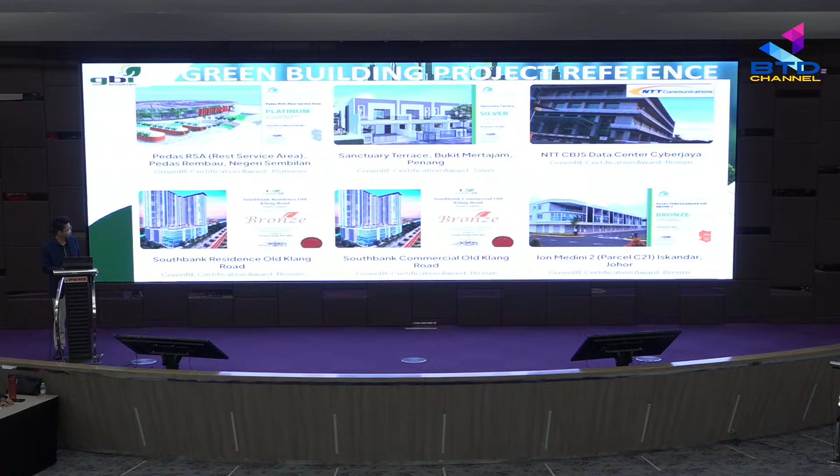So next I would like to go into a brief introduction of what green building is all about. So in today's session, we are going to cover 5 parts. Introduction to green building, and also introduction to specifically GBI untuk residential new construction. Lepas tu, it will be divided into 2 parts. Part 1 untuk energy efficiency and indoor environmental quality. And part 2 for sustainable site planning and management, water efficiency, material and resources, and also the innovation points lah. Yang paling last sekali kita akan tengok kepada green incentive.

So without further ado, what is green building actually? Actually green building refers to a practice of creating structures and processes that are environmentally friendly and resource efficient throughout the entire building punya life cycle. Dia start daripada site selection, to design, construction, operation, maintenance, renovation, and even demolition.

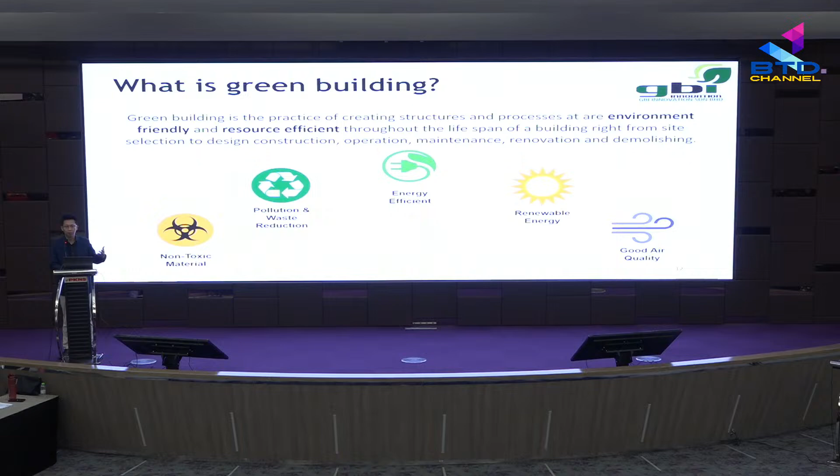So for the business benefit, of course, when we look at green building, we're probably looking at a higher investment capacity. The upfront cost will be higher, but ultimately, if you look at the long term, with good design and good material selection, operation costs will be lower in the long run. So overall, you can still see that the building will actually require less cost to operate.

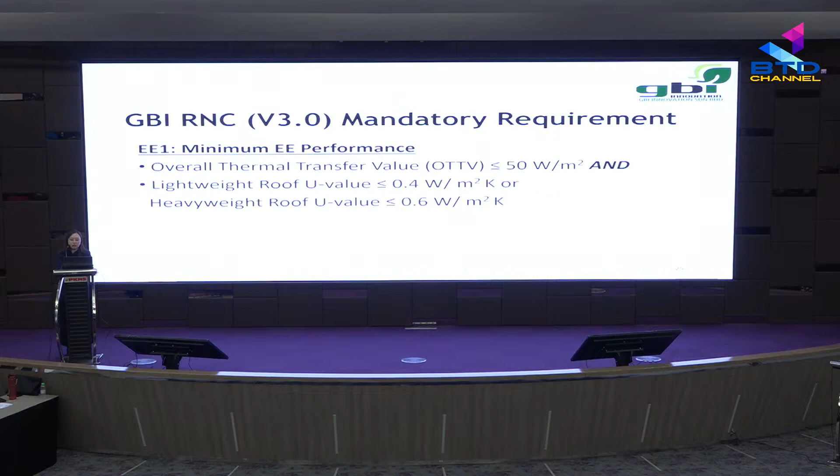So we would also like to emphasize that in GBI RNC, as well as other GBI tools, it is a mandatory requirement to have your overall thermal transfer value of the building, or OTTV, to be less than 50 watt per meter square. And your lightweight roof U value must be less or equal to 0.4 watt per meter square Kelvin. And if you have a heavyweight roof, then the requirement would be a U value of 0.6 watt per meter square Kelvin.

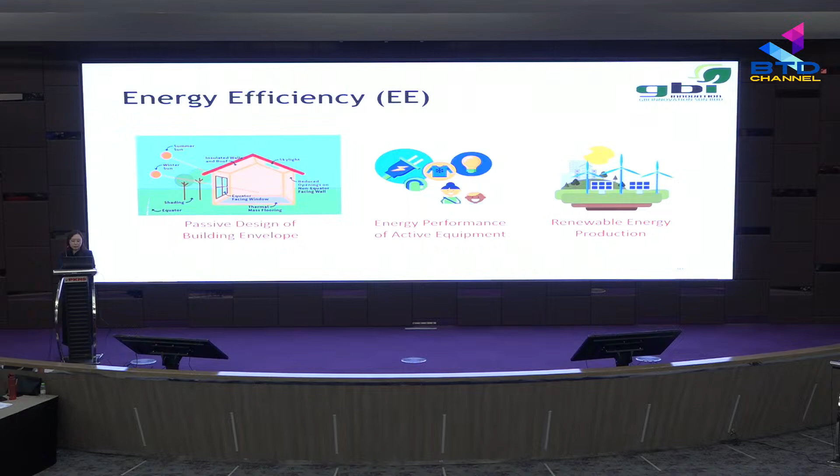So to ensure your building is energy efficient, we'll need to look into these 3 main factors. The first one would be passive design of the building envelope. The next one will be energy performance of the active equipment, or lighting and air conditioning. Then the third one will be renewable energy production, or solar PV. So when we talk about passive design of the building, we are looking at the architectural design of the building that indirectly affects the energy consumption.

So this would mean we are looking at the building envelope. So what is the building envelope? It is the exterior part of the building that separates the interior from the outside environment. Components of the building envelope include walls, windows, roof and doors, etc. These components work together to shade, to insulate, to ventilate, and to daylight buildings. These strategies are also stated in MS 1525, the Malaysian Code of Practice on Energy Efficiency and the Use of Renewable Energy.

So the first 2 credits would be minimum EE performance and advanced EE performance. Firstly, it would be looking at the overall thermal transfer value, or OTTV. OTTV is a measure of how the building's passive design is able to reduce heat gain through the building envelope. This would result in a lower cooling load in the air conditioning system, and consequently lower the energy consumption of the building and also operational carbon emissions.

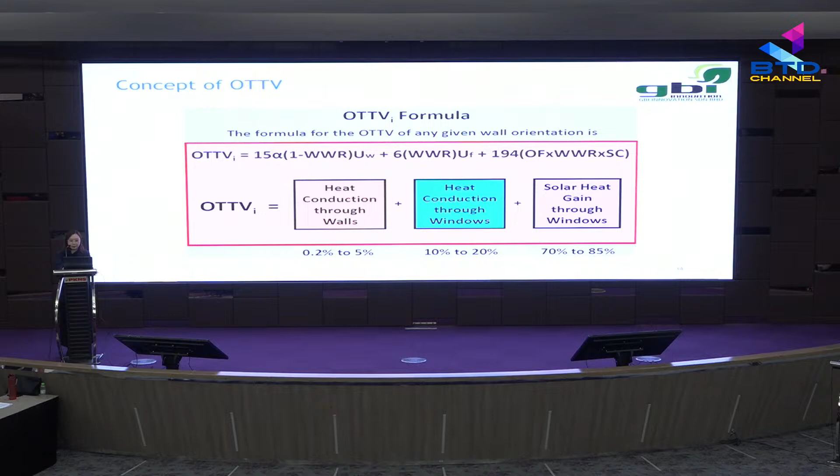So for the first part of the formula, we can see here that the alpha value in the formula is referring to the color of walls. Then we also have WWR, or the window to wall ratio. And Uw would be the U value of wall. By U value here, we mean the thermal transmittance of the wall.

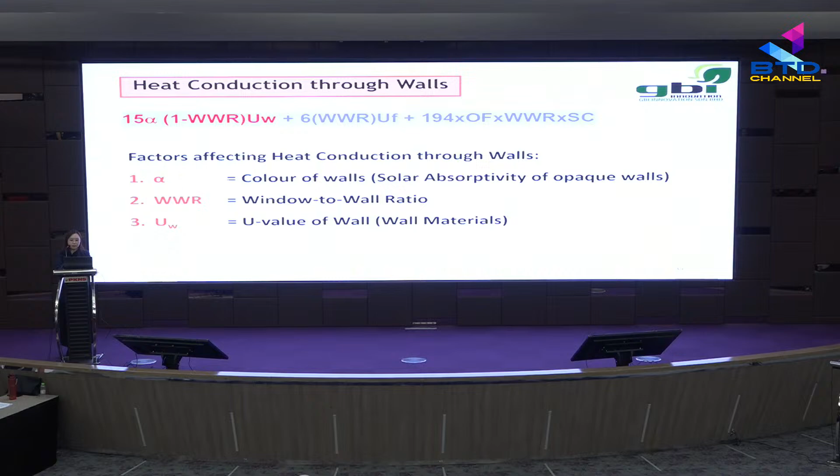So as for this first part, we will look into the wall materials itself. For the wall material, the U value itself is a very important value, and it's a measure of the material's ability to allow transfer of heat into the building. So the lower the U value of your wall, it would mean that it will allow less heat to transfer inside into the building interior.

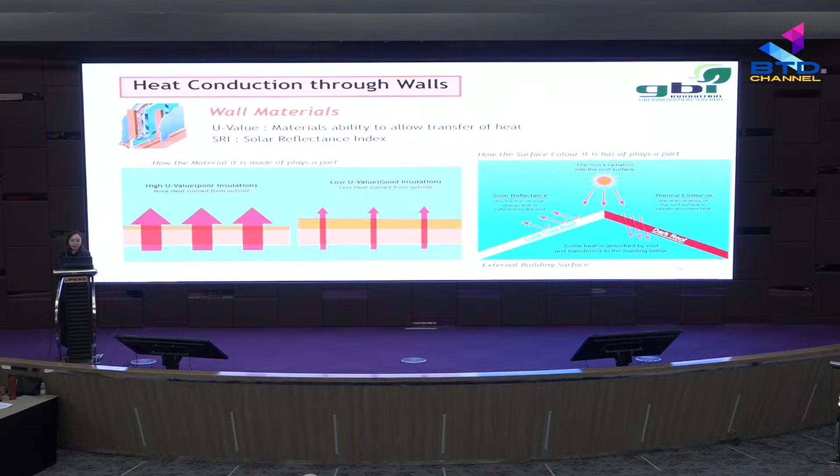So the next part of the formula would be the window to wall ratio, or WWR. The WWR here we mean is the area of windows divided by the area of walls. It is important to manage the WWR because of the solar heat gain of the building, as mentioned previously, then also the insulation effect through the windows, and also the amount of daylight penetrating into the interior spaces, as well as the corresponding amount of artificial light required to illuminate the room. And the last part would be how much shading devices need to be provided.

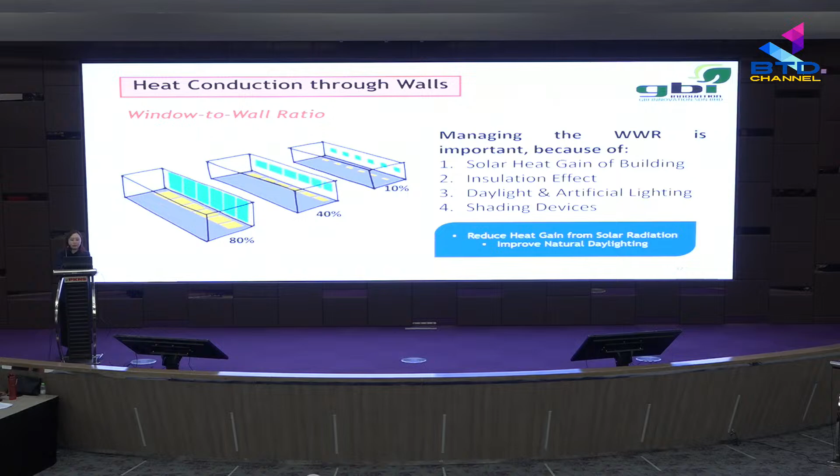So the next one would be how we calculate the window to wall ratio. We have a simple example here, where if we have a wall with 5 meter length and 4 meter height, and a window of 2 meter length and 2 meter height, our WWR can be calculated as 0.2 here.

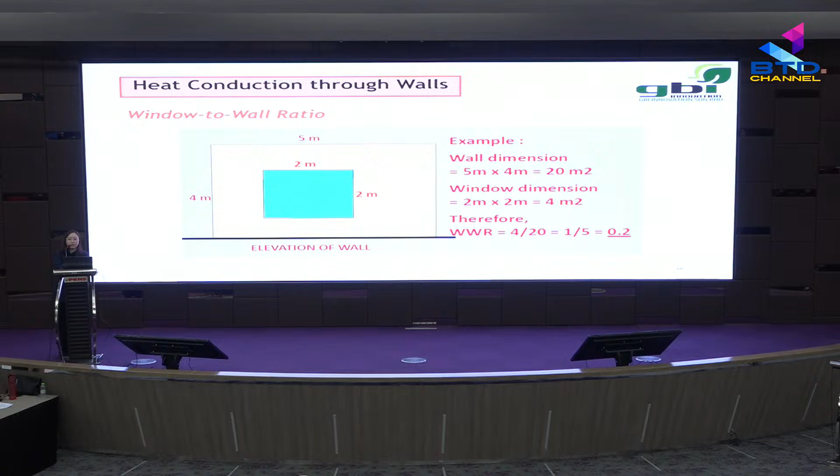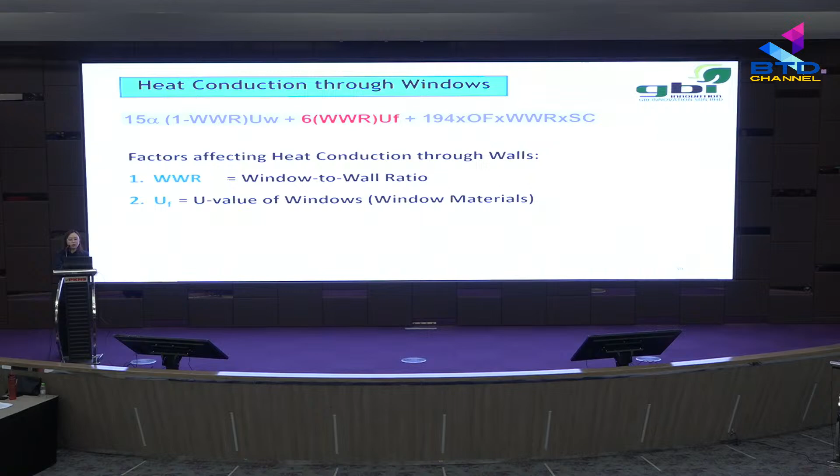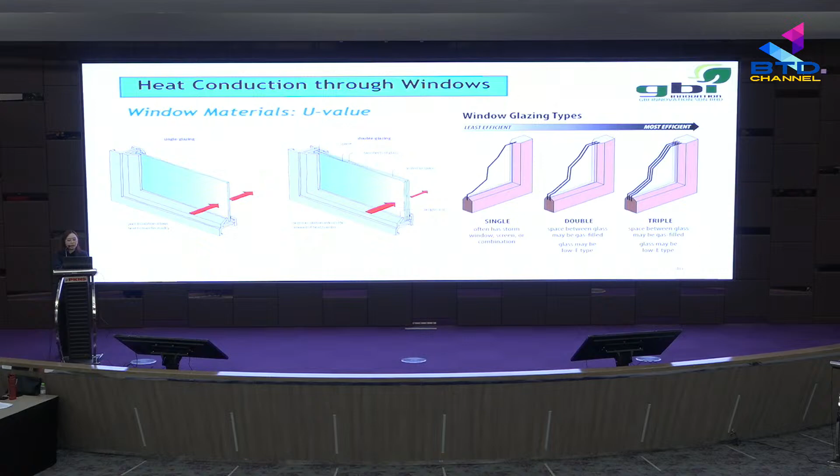Then the second part of the formula would be heat conduction through windows. From here, we also need to include the WWR, as well as the U value of windows, which is again the thermal transmittance. So the window material performance here is determined by, firstly, the layers of glazing, as well as the color. In this case, we mean that the laminated glass or double glazed glass can have a lower U value compared to a single layer glass.

As for the color of the window, if you have a darker color, such as dark green or dark gray, then it will be able to filter out more heat than a clear glass or light green colored glass. So in general, for compliance to the OTTV value of less than 50 watt per meter square, your thermal transmittance or U value should be less than 5.7 watt per meter square Kelvin, and your shading coefficient, SC value, should be less than 0.7.

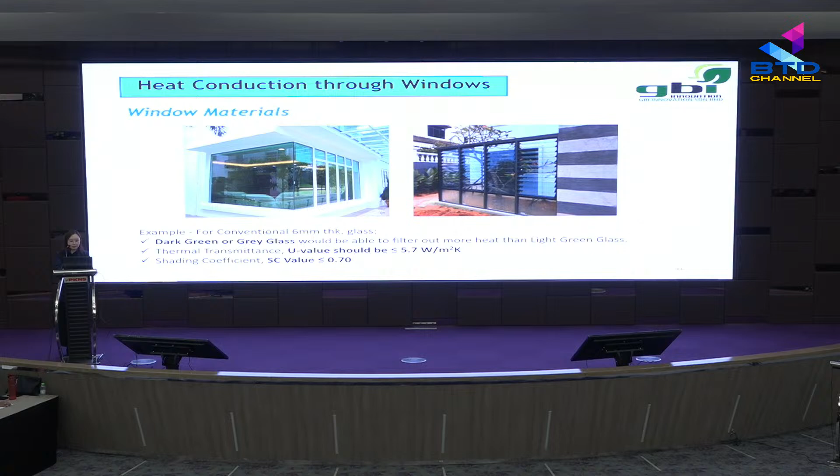So the last part of the formula would be the solar heat gain through windows, whereby we consider the orientation factor or OF, and once again the window to wall ratio, and the last part would be shading coefficient. The orientation of the building is very important here because of the east and west versus north and south exposure. So we advise to try to have lesser windows at the east and west directions, as Malaysia's tropical climate would cause intense sunlight in these directions, especially during the morning and afternoons. So we try to maximize the north and south orientation, therefore minimizing the solar heat gain into your building.

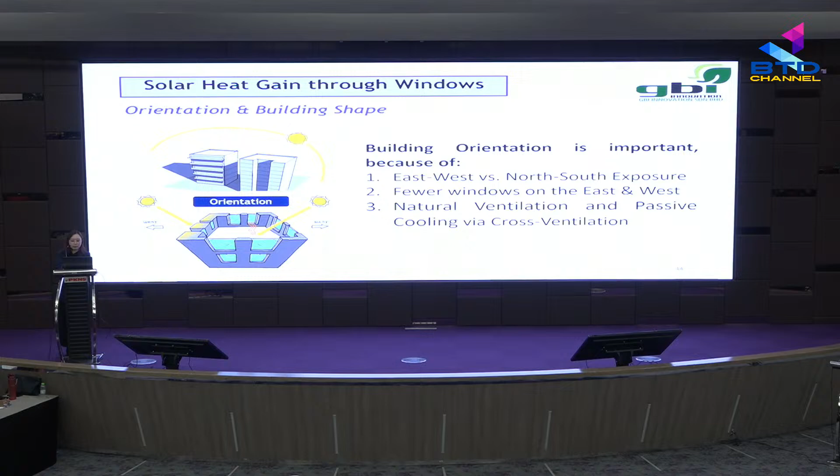And correspondingly, the building orientation will also affect how much natural ventilation and passive cooling that you are able to supply to your building. So the next part would be the SC value or shading coefficient. Actually we have two coefficients that we will need to consider here. The first one would be SC1, which is the characteristic of the window. A lower SC1 here would mean that a less amount of heat is transmitted into the building.

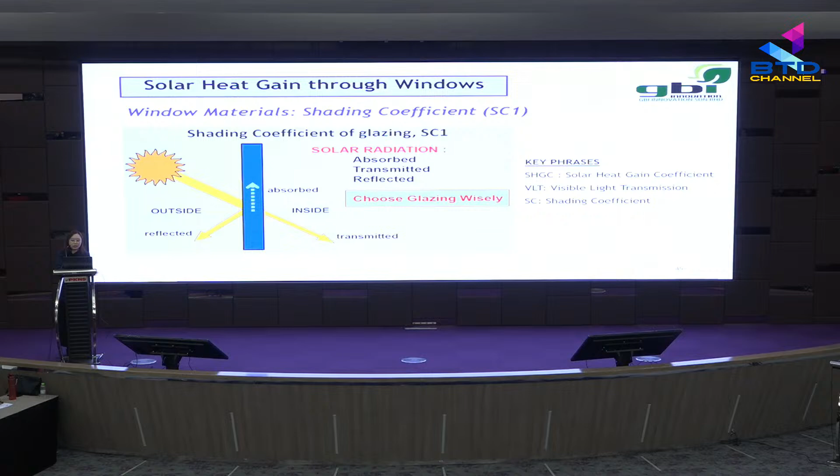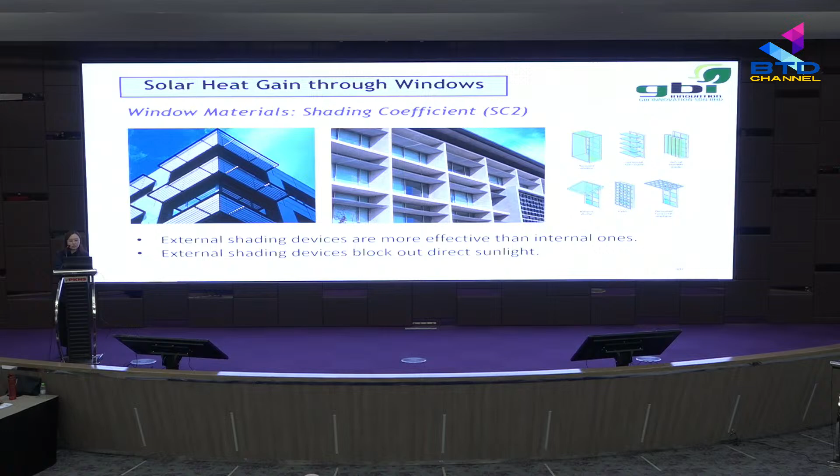But on the other hand, it will also mean that there's a less amount of light also transmitted into your building. So therefore, you also need to consider the VLT or visible light transmission value of the glass in order to make sure there's a right balance between how much heat gain you reduce and also how much good daylighting you bring into the building. Then the other shading coefficient, SC2, is affected by how much external shading devices you provide. This would mean horizontal or vertical shading devices, as well as recessed windows. So these will also need to be taken into account in your OTTV.

Then the second compliance value would be the roof U value. So as mentioned previously, your lightweight roof U value must be less than 0.4, and your heavyweight roof U value must be less than 0.6. So lightweight roof is defined as non-concrete roofs and have a density of less than 50 kilogram per meter square. And if you have heavyweight roof, it is referring to concrete roof with a density of more than 50

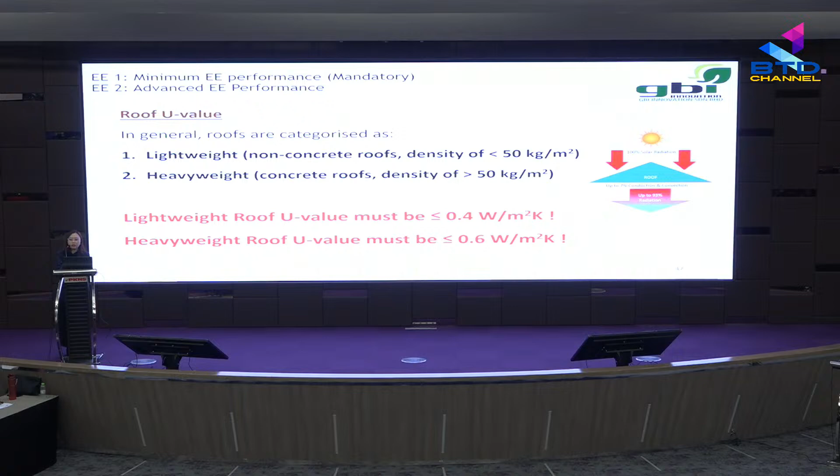kilogram per meter square. So this is in general how we would calculate the roof U value, where we take all the layers of the roof, and in order to comply with the mandatory conditions previously, you will need to include roof insulation into your roof. So normally it is divided into two types, which is the bulk and mass insulation, and also reflective insulation and radiant barrier. So in general, for lightweight roof, we would use mineral wool and glass wool. And for heavyweight roof, we would use spray foam or extruded polystyrene and expanded polystyrene.

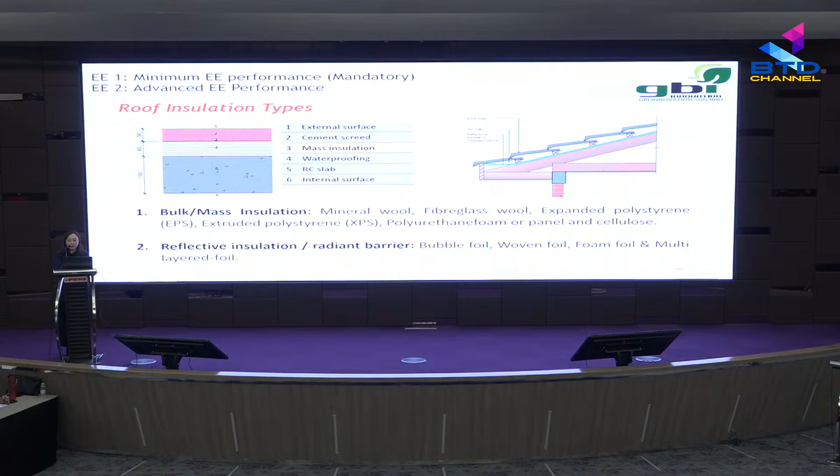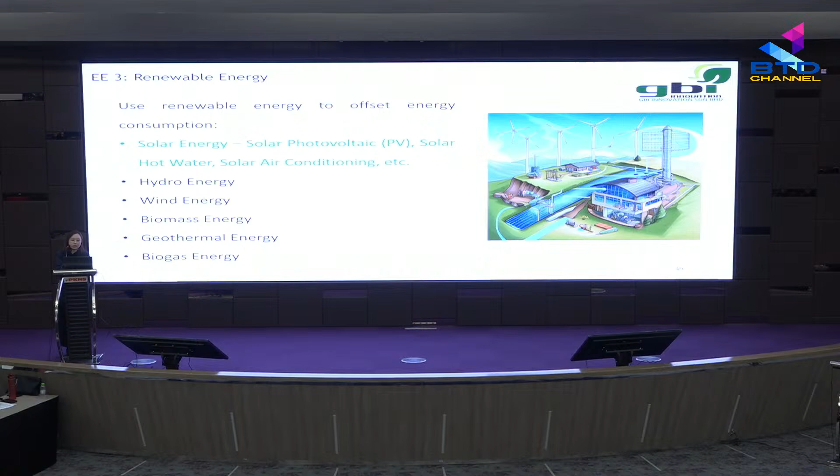So for the next part is EE3 renewable energy. So there are many types of renewable energy that can be used, but in this case, we are referring to solar energy. So this can be supplied using solar photovoltaic, solar hot water, and solar air conditioning. So solar PV here is highly recommended to be used to generate renewable electricity in residential buildings.

And for this criteria, we will need to supply the following to GBI for their evaluation, such as the scale as-built building plans and elevations, manufacturer issued specifications on the renewable energy equipment, as well as the proof of percentage of renewable energy compared to the total building energy consumption or TNB bills for a minimum of 3 months to 6 months.

So the next part of EE would be EE4, which is external lighting and control. So the first point that you can score would be high efficiency external lighting that must be provided to common areas such as the lift lobby, the staircase, the car park and gardens. And your lamp efficacy here must be more than 80 lumens per watt. So a high efficacy of the lamp means that your lamp is more energy efficient.

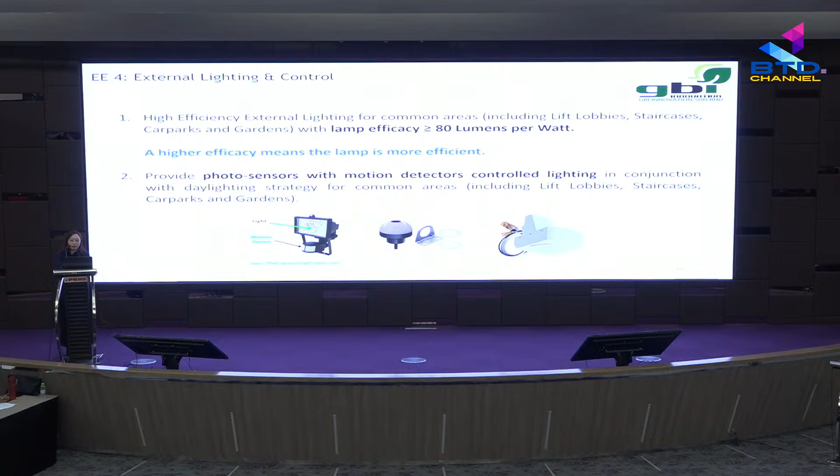Then the last part of EE would be EE6, or Sustainable Maintenance and Building User Manual. So it is important to have a designated building maintenance office with enough space to keep all the maintenance equipment and tools as well as spares. And you must have at least 50% of the permanent building maintenance team on board 3 months before practical completion.

Then you must also make sure that the main contractor has provided a full set of hard and soft copy of all the building and system drawings, as well as the maintenance plan to this building maintenance team. And also make sure to provide evidence of at least 3-year facility maintenance and preventive maintenance budget. Then the last part would be the Building User Manual, or BUM, that's provided by the GBI facilitator for user information and also for the building maintenance team to guide them to sustain performance during occupancy.

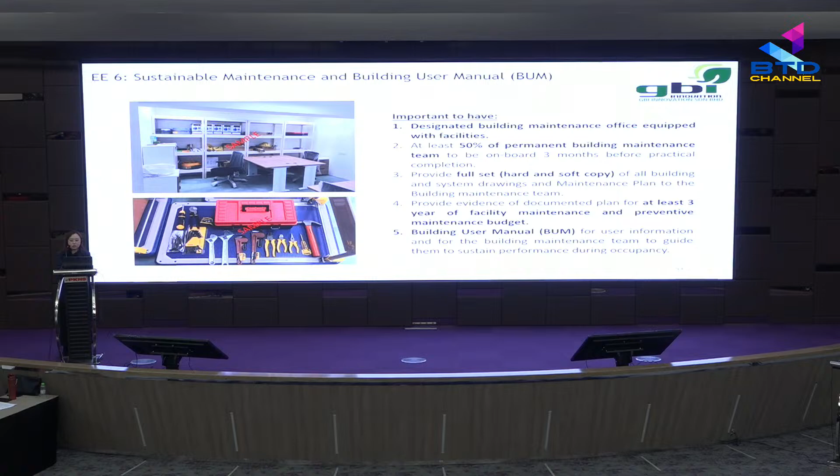So the second criteria for GBI RNC would be Indoor Environmental Quality, or EQ. So here we have 7 total scoring points, which is firstly EQ1, Minimum Indoor Air Quality Performance. And then we have EQ2, VOC minimization. EQ3, formaldehyde minimization. Then we have EQ4, daylighting. EQ5, external views. EQ6, sound insulation. And the last one would be EQ7, post-occupancy evaluation.

So the characteristics of a green building under IEQ would be firstly the indoor air quality and ventilation, then the natural daylighting, the thermal comfort of building occupants, as well as the low VOC material and no formaldehyde materials.

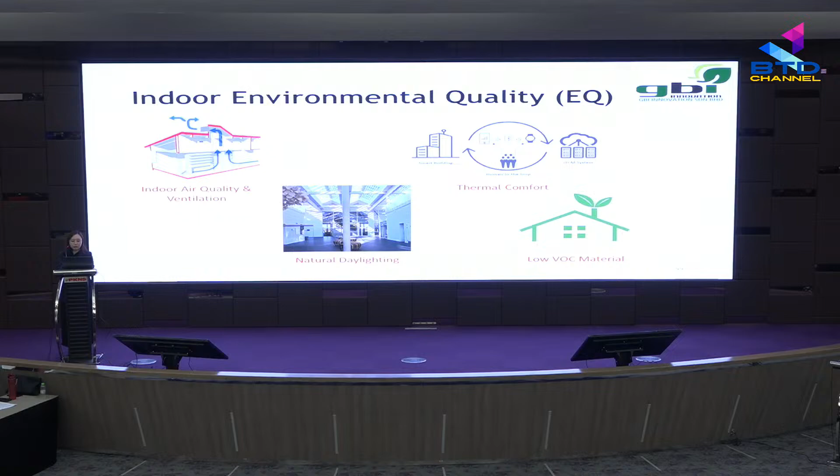So the first part of EQ is EQ1, minimum indoor air quality performance, where we must make sure to provide adequate openings for all habitable rooms as required by the following local building codes, such as ASHRAE Standard 62.1, where it specifies the minimum ventilation rates and IAQ acceptable to human occupants in a building. And also the MS 1525:2019 and the Uniform Building By-Laws UBBL 1984.

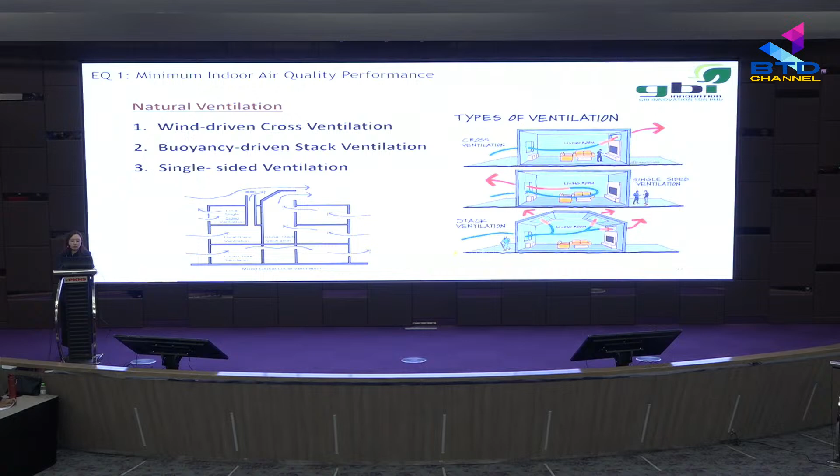So we can achieve this by providing outdoor air ventilation or fresh air intakes. So fresh air, in this case, can be brought in via windows through natural ventilation. So there are 3 types here, where we have cross ventilation, then we also have stack ventilation and single-sided ventilation.

So the next criteria for EQ would be EQ2 VOC minimization, where we must make sure to use low VOC products for paint and coating for walls and ceilings, then also for carpet flooring and adhesive and sealant. So we require test reports to confirm the VOC content,

as well as the green certs, such as for Malaysia, the SIRIM Eco Label or MyHIJAU. Then from Singapore, we have Singapore Green Label and Singapore Green Building Product, or SGBP. Then also for carpets, we have CRI Green Label and also Greenguard. These two are global standards.

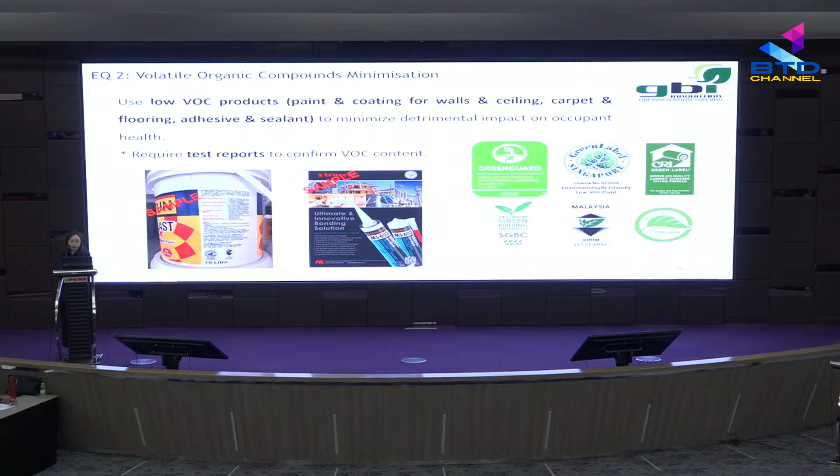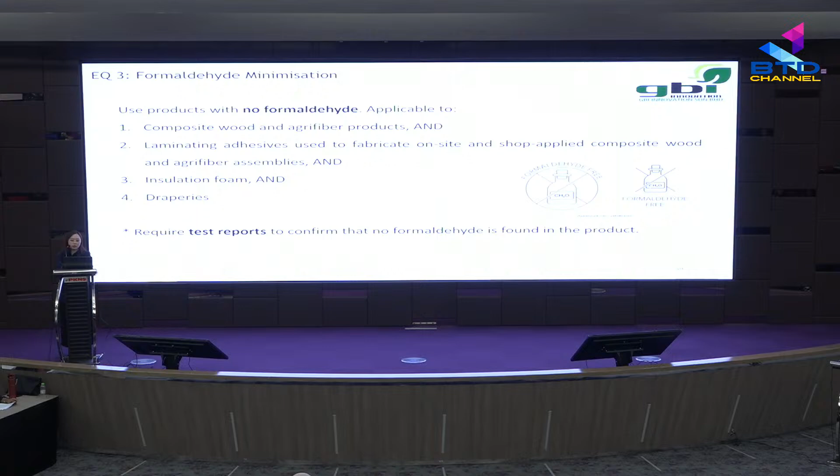Then for EQ3, which is formaldehyde minimization, we must use products with no formaldehyde, and this is applicable to composite wood and agri-fiber products, such as MDF board, plywood and particle boards. And also for laminating adhesives used to fabricate on-site and shop-applied composite wood and agri-fiber assemblies. Also for insulation foam and draperies. So once again, we will require test reports from all these products to confirm that there's no formaldehyde found.

Then the next one would be for daylighting. So we must make sure that all habitable rooms as defined under UBBL must have a daylight factor of minimum 0.5%. The daylight factor here is calculated using the internal lux level divided by the external lux level. The lux level here is a measure of light intensity.

So normally during site verification, we will take a lux meter to measure on site. And if it's during our design assessment, then we'll use DIALux simulation to simulate this. And we must make sure to use overcast sky conditions during your simulation.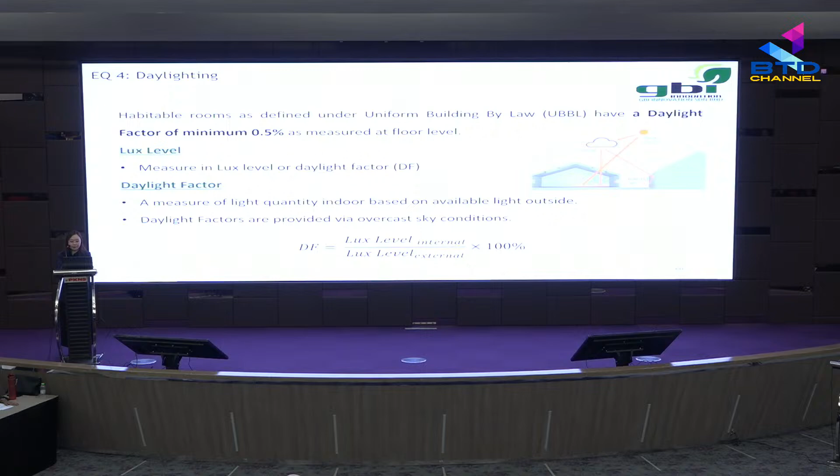Then for EQ5 external views, all habitable rooms here must have a direct line of sight to the outdoor environment through windows. So you must make sure the external views here are achieved between 0.8 meter to 2.2 meter from the floor finish level. And it is also important to emphasize that external views should not face any nearby neighboring buildings, but should instead be open to a clear, unobstructed view.

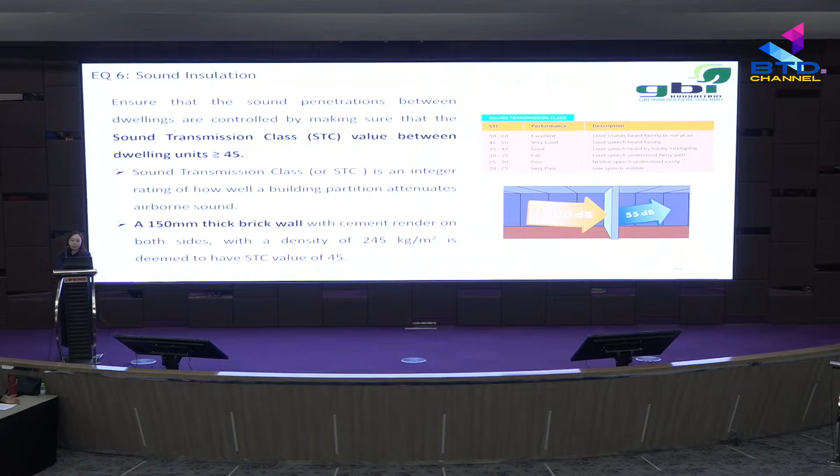Then for EQ6 sound insulation, we must ensure that sound penetration between dwellings is controlled by making sure that the sound transmission class, or STC value, between dwelling units is more than 45. The STC value here is an integer rating of how well the building partition attenuates airborne sound. So in general, if you have a 150 mm thick brick wall with cement render on both sides and a density of 245 kilogram per meter square, then you have an STC value of 45.

And the last part of EQ would be EQ7, which is a post-occupancy comfort survey. We will normally conduct this survey with building occupants within 12 months after the issuance of the CCC. And it is regarding air quality, thermal comfort, daylighting comfort, visual comfort, and acoustic comfort.

So if your survey results show that more than 20% of the occupants are dissatisfied with the comfort of the building, then a corrective action plan must be developed and implemented in order to address and resolve these issues. Okay, thank you.

So that will be all for our first part. Now we'll be open to any Q&A, if anyone has any questions to ask. If not, then we can go for a 15-minute toilet break. Okay? Okay, then I think we proceed for a 15-minute toilet break first. Okay, thank you. We'll return for the second part.

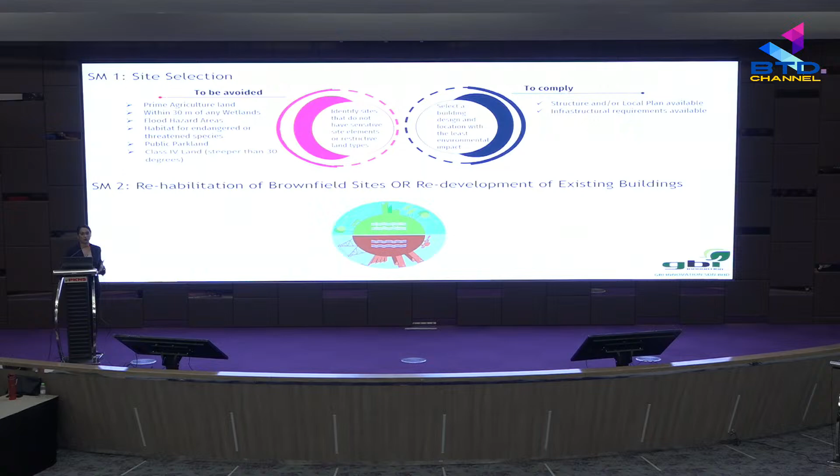So these two credits focus on the site type, emphasizing selecting a proper site without touching undeveloped land. Whereas the upcoming credit, SM3, encourages selecting a site with available amenities surrounding it. When you develop a site without surrounding amenities, you have to build amenities for the development. So this will reduce new amenities, and it also emphasizes utilizing the available local amenities surrounding the site.

So for this credit, you can claim 5 points based on the number and the type of basic and other amenities available surrounding the building. These are the few listed amenities that you can claim from, and the eligible amenities should be within 750 meter walking distance or radius from the site.

Moving to the next credit, SM4, this focuses on pollution control during construction and earthwork. This deals with soil erosion, waterway sedimentation, and air pollution. To go for this credit, we need an ESC plan, Erosion Sedimentation Control Plan, which complies with the erosion and sedimentation requirements of the approved earthwork plan or the local code, whichever is more stringent.

Inside the ESC plan, it should outline all the measures that meet these three objectives: to prevent sedimentation, prevent soil erosion, and minimize air pollution from construction activity like dust and particulate matter. And this ESC plan should be signed by a qualified C&S engineer.

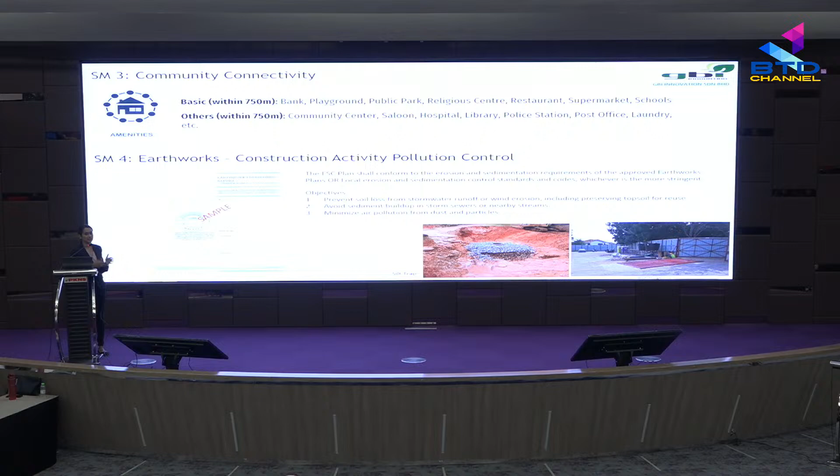So here is a sample of commonly implemented controls on other sites: silt traps to avoid sedimentation, wash troughs to avoid air pollution. And all the measures that you've implemented on site should be reflected in the construction progress report.

Moving to the next credit, QLASSIC, this credit promotes proper planning and skilled workmanship to avoid any wastage and any rework in the construction. To meet the requirement, the project needs to go for QLASSIC assessment and score a minimum of 70% to obtain the point. So here is a certification sample from another project for the submission.

Moving to the next credit, workers' site amenities. This credit focuses on workers' well-being on site. These are the measures that should be implemented as part of the site amenity plan: first, to provide proper accommodation for the workers on site or temporary accommodation near the site.

Second is to prevent pollution of the storm sewer or receiving stream by having a proper septic tank. Third is to prevent pollution by open burning and improper disposal of construction waste by providing proper recycle bins. Fourth is to provide sufficient health and hygiene facilities for the workers, such as a first aid kit and clean drinking water. And fifth is to provide mobile toilets. For high-rise building construction, it is recommended to provide a mobile toilet every fifth floor for the workers.

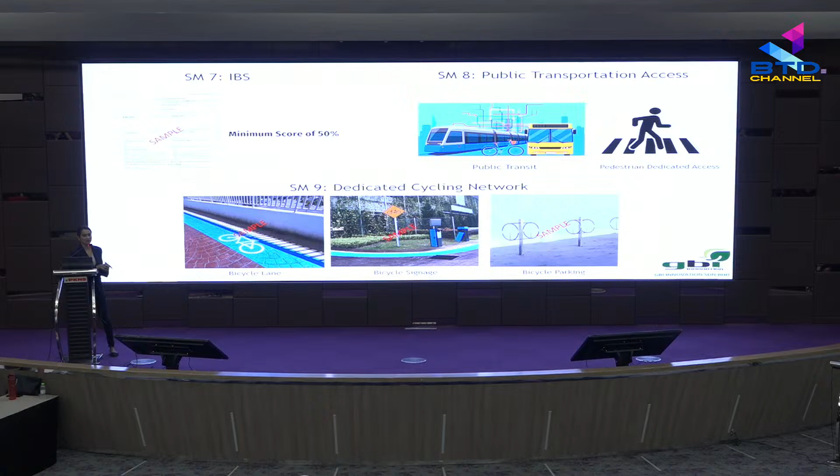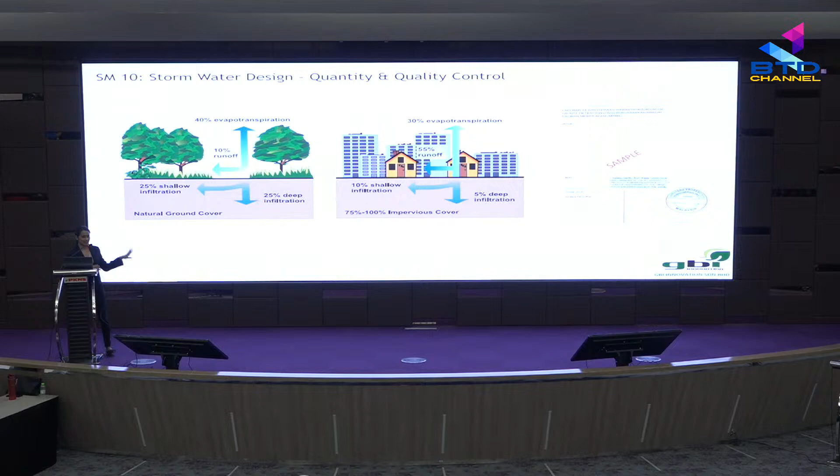Okay. The 10th credit is stormwater design. These credits manage the quantity and quality of stormwater. This is to limit the disruption of natural hydrology and also to eliminate water pollution. The common strategy to reduce the stormwater runoff is to reduce the impervious area, which automatically increases the infiltration of the development, and by then we can eliminate the polluted stormwater runoff as well. For this, we need to submit a MASMA report with the Q post and Q pre detailed calculation for the submission.

Okay, so the next 3 credits, from SM11 to SM13, are all about heat island effect. I think we are all aware of heat island effect, where the city temperature is higher compared to the rural area, as reflected in the heat island profile. There are so many factors that contribute to the heat island effect. Main factors are the building materials that we select for the outer layer, and also the color which absorbs more heat, and also the lack of vegetation on the building and the surrounding buildings. We can eliminate heat island effect by strategies.

Here are the strategies that you can implement to eliminate the heat island effect and also to score points under GBI. If you have more green space with native and adaptive plants and also water bodies like swimming pools and lakes, based on the percentage, you can claim points under SM11. And for hardscape, exposed hardscape like exposed parking, sidewalks, podium, terrace, if you're using material with an SRI value of at least 29, or you're providing shading, or you have open grid pavement, or a combination of any of these, then you can claim points based on percentage as well.

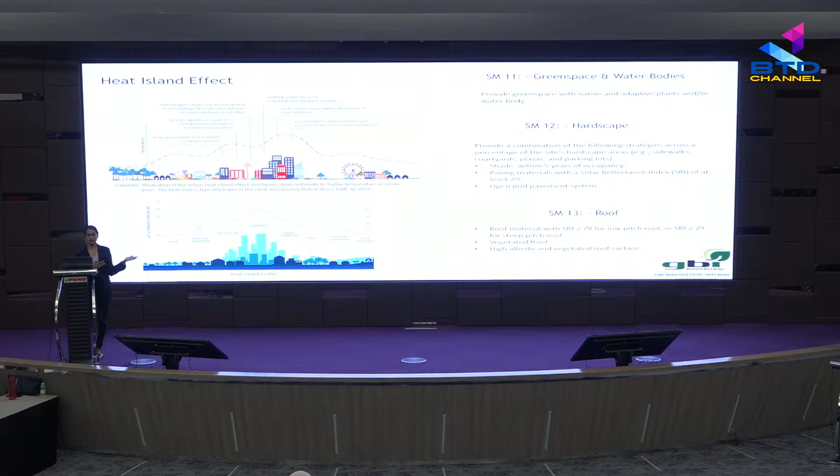And the last one under this category, SM13, is on the roof. If you have a low-sloped roof with SRI material of at least 78, or a steep pitched roof with SRI of at least 29, or a vegetated roof, or a combination of these, you can still claim points under SM13 with the percentage as well.

Okay, the last credit of this category is composting. This is to encourage recycling of organic and landscape waste to minimize the usage of synthetic fertilizer. The strategy: you can have a compost bin to recycle it, and/or you can have a program for the recycling. But if you are planning to have a compost bin, it is advised to have more than one, because having one doesn't really meet the requirement, because with the composting process, you have to wait roughly 3 months for it to become fertilizer. So while waiting for one to become fertilizer, you can still use the other one. So it is recommended to have more than one compost bin in the development.

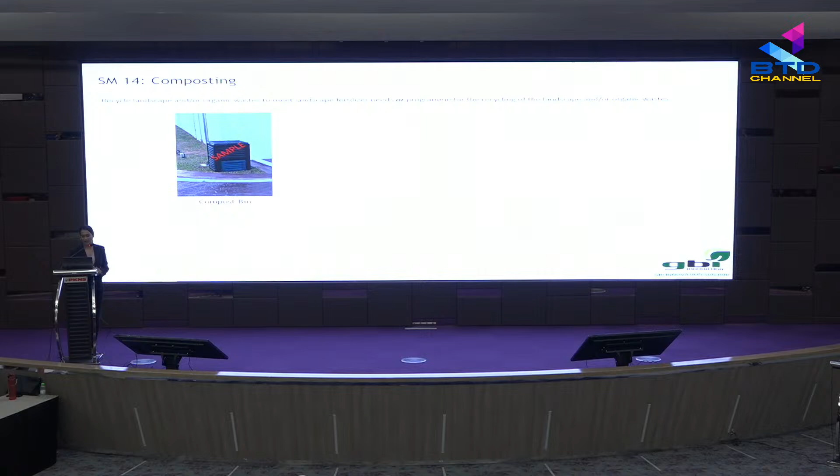Okay, so that's on SM. It's mainly focused on site planning, utilizing the site amenities, and encouraging the use of public transportation. Moving to the next, material and resources. This category mainly focuses on construction stage activity and waste management, aiming to reduce the environmental impact of construction through efficient use of material. There are 6 credits with a total of 12 points to score from.

The first credit of this category is reuse of building material. This credit emphasizes reducing the demand for virgin material and minimizing waste by reusing building components. This approach also reduces the environmental impact associated with extracting and processing raw material. Examples of material that you can reuse are aluminum formwork, window frames, door frames, and so on. You can claim for aluminum formwork, but you can't claim for timber formwork, because timber formwork is considered one-time use and not a reusable material. And reusing material not only conserves resources, but also extends the life cycle of the material and reduces the carbon footprint of the building.

For this MR1 until MR3, we will calculate based on the percentage of reused or recycled content material or regional material. So for MR1, to calculate the percentage of reused material on the development, we need a few details such as total construction cost, excluding the mechanical, electrical, plumbing cost. And second is total material cost.

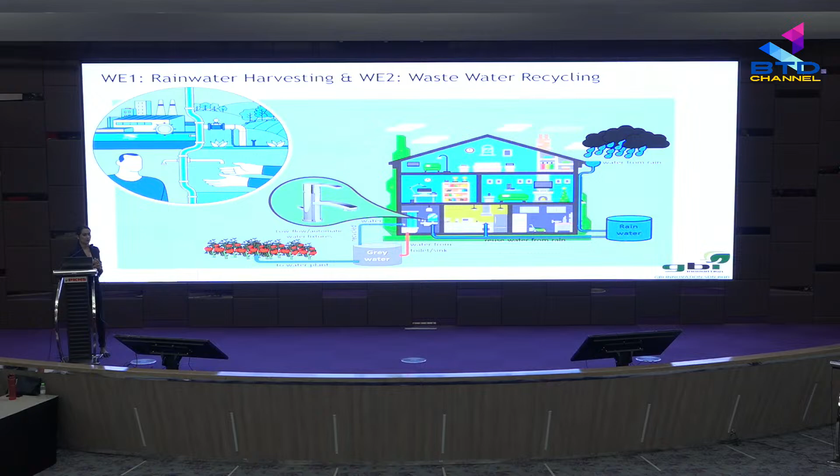Okay, the next credit is on irrigation and landscape. So to reduce the usage of potable water, it is encouraged to use native and adaptive plants in the landscape, which require a minimum amount of irrigation or water. And for the irrigation system, as you have the rainwater harvesting tank, you can use the rainwater for the irrigation. There are usually 3 types of irrigation system, which are drip, sprinkler and manual. Usually for drip and sprinkler, the coefficient in the calculator is lower compared to manual irrigation.

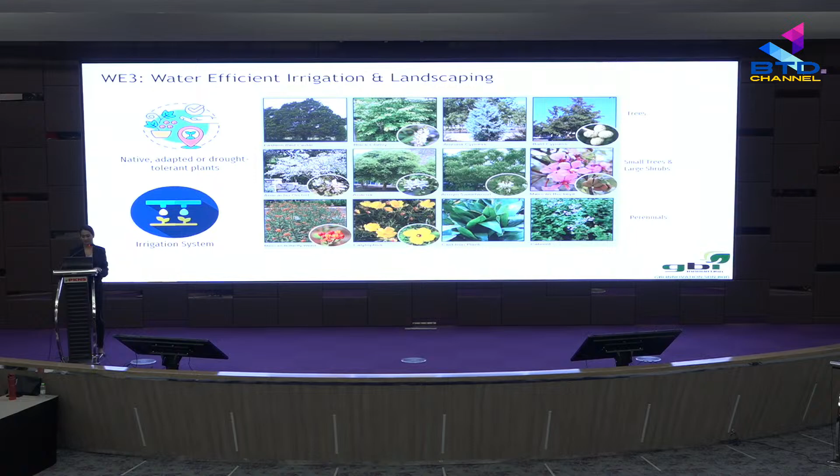Okay, the last credit of this category is water efficient fitting. Apart from having rainwater and looking into the landscape, the main consumption is within the building, the potable water consumption. To reduce that, you can use water efficient fittings, which are rated by WEPLS, or have a low flow rate or flush rate. You can submit fittings without the WEPLS certification, but they have to have a test report mentioning the flow and flush rate is lower and can achieve the percentage that you want to gain the point for.

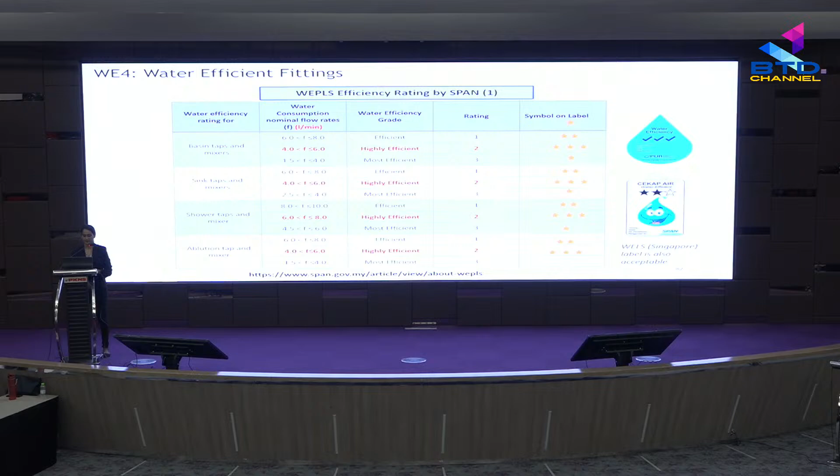Okay, let's bring us to the last category, which is innovation. This innovation category usually provides an opportunity for the development to implement green and sustainable features which are not listed in any previous credit or category, but if you have some innovation and it meets the green and sustainable aspect, then you can claim it under this category. There are 2 credits. The first one is for innovation design, up to 7 points we can claim, and the second credit is for appointing a GBIF.

So here are the common innovation strategies implemented in other residential buildings, such as having an EV charger. For each strategy you can have 1 point, and they have their own requirements to meet. So if you're having an EV charger, you can have at least one EV charger in your development, but for 5% of your total parking lots, you have to provide provision for future installation of EV chargers, up to a maximum of 20 lots.

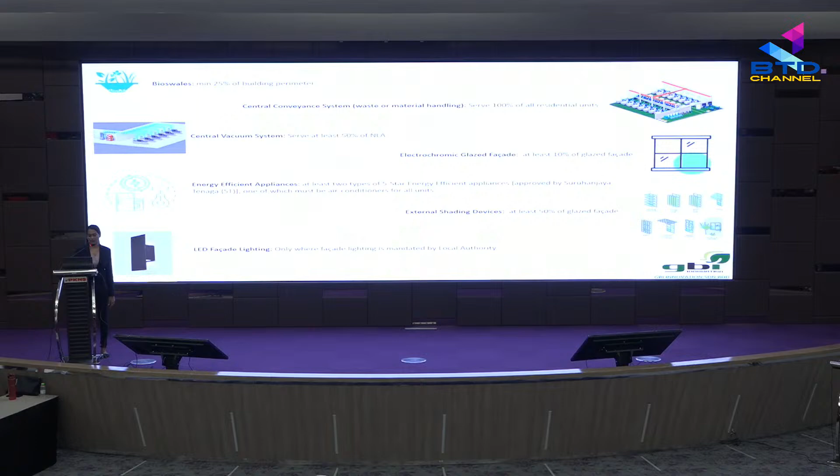And the next one is having 50% of your lifts be regenerative lifts, then you can still claim an innovation point under this category. Apart from those common innovation strategies, there are a few more which have been listed on the GBI website with their requirements, such as bioswale, external shading device, LED facade lighting, energy efficient appliances, light pipe, solar hot water for all the showers, turbine ventilator, and self-cleaning facade. So these are the few you still can claim points for.

If, let's say, you have another innovation that's not listed on the website or in any other credit, you can still submit it for the evaluation process with a detailed explanation and documentation. It depends on the assessor's evaluation, but there are still opportunities for us to implement new strategies as long as they meet sustainability and green features, and we can still submit for it.

Okay, so that brings us to the end of the overall green scoring categories in GBI certification. There are 6 categories, and each category has its own credits and requirements to meet. Here we highlighted all the key factors that need to be considered in your design and development. But claiming points is based on the percentages and numbers that you have to meet. By meeting them, you can claim your points so that you can reach your targeted certification level: certified, silver, gold or platinum.

But for the submission, we advise going with a buffer of 5 points. At the design stage, we can design everything according to the requirements, but when it comes to the construction stage, that's where the development will face challenges to meet it. And the percentage, as I mentioned, for construction waste management is usually very hard to meet at the construction stage. At design stage we can claim it, but at construction stage, proving it with receipts is very hard. So these buffer points help safeguard the target level that we are aiming for.